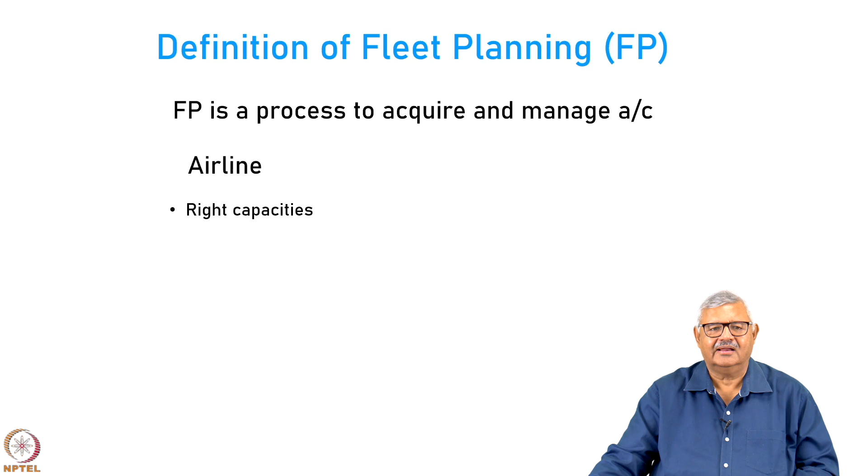Starting with the definition of fleet planning, it's a process to acquire and manage aircraft. Mark these words, all of these words are very important. Fleet planning is a process to acquire and manage aircraft, and for an airline, fleet planning ensures right capacities. For a leasing company, it represents the right portfolios.

These capacities of the airlines are required to serve the anticipated markets over many predefined time periods and to maximize the corporate wealth. That is fleet planning from the airline point of view, deploying the correct capacities on the anticipated markets over a period of time, the purpose being maximizing corporate wealth.

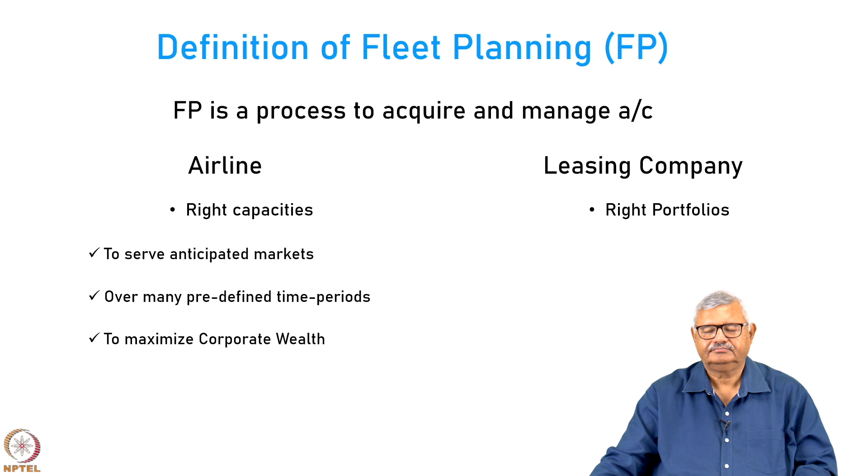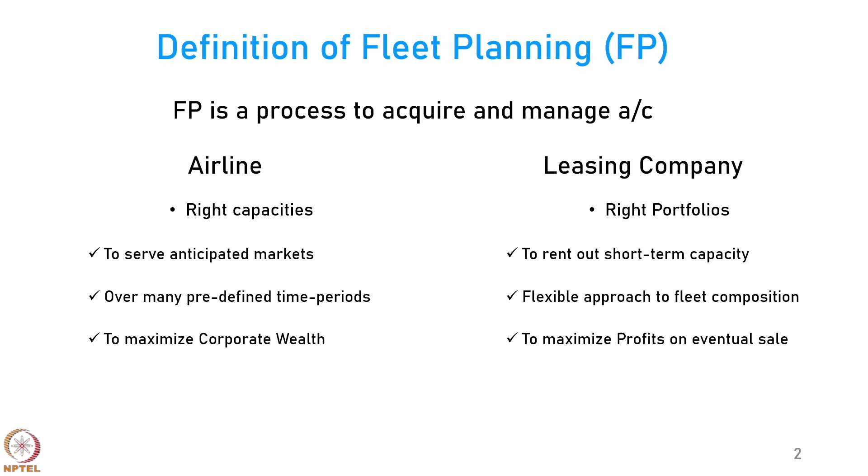For a leasing company, however, fleet planning has a slightly different connotation. Their aim is to rent out short-term capacity to various airlines who are unable to commit funds to buy large aircraft. It allows a flexible approach to fleet composition because an airline can lease and return the aircraft as and when its demand fluctuates. The aim of fleet planning from the point of view of a leasing company is to maximize their profits on the eventual sale of the aircraft.

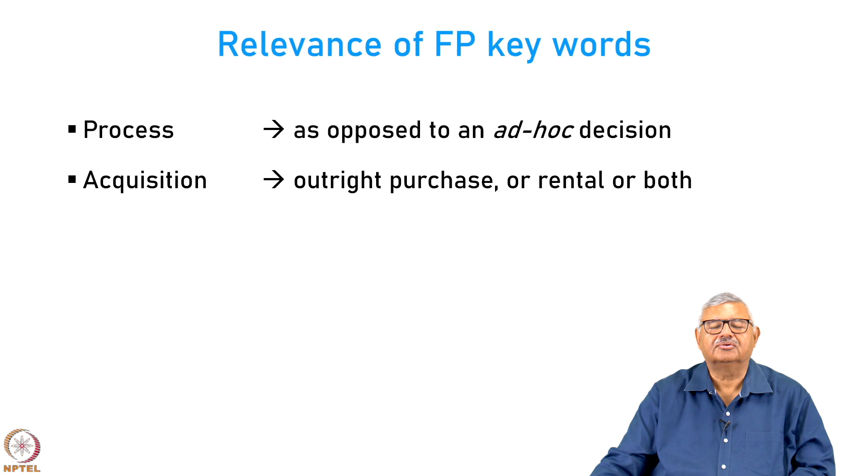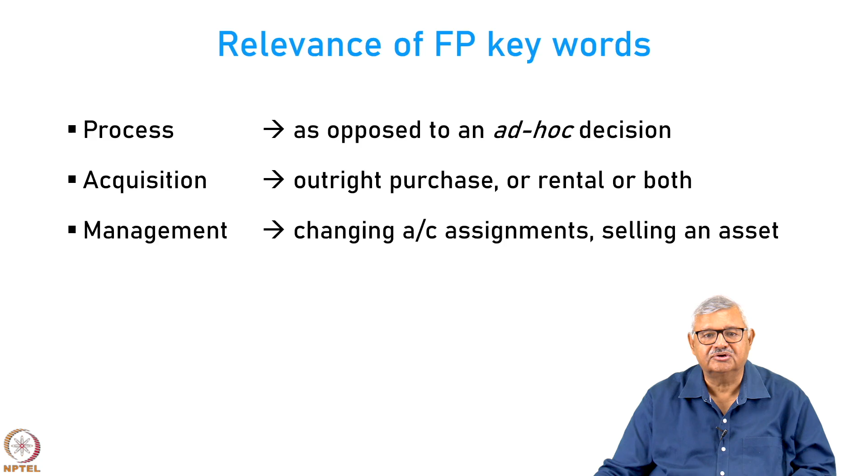There were many keywords in the previous statements which I made. Let us understand the relevance of each of these. Fleet planning is a process as against an ad hoc decision to simply buy a particular aircraft. When we say acquisition, it could mean purchase or rental from a lease agency or both. Then when we say management, what do you have to manage? You have to change the aircraft assignments, and you have to ensure that when the asset is being sold, it is done in a very consistent manner.

Capacity. Capacity stands for various things. It stands for number of seats. It stands for how much is the volume of the cargo you are carrying. Capacity also can stand for what frequency you are offering on a particular route.

Then remember, fleet planning is not done for today or tomorrow. It is done keeping in mind provision of services to the anticipated demand over short term, medium term and long term. You simply cannot buy and operate aircraft on a daily basis. You have to plan for it. It takes time. Airlines have a very long order book. You place the order today, you may get it after 5 years. Leasing companies can provide you the aircraft in a much shorter time, relatively, but only if it is available. So you have to look at not just today's requirement, but also the requirements of the forthcoming period.

The time periods could be keeping in mind the long-term view, keeping in mind that over a period of time a particular line becomes obsolescent, and also regulations might change. There could be tightening of noise regulations, emission regulations. So what you can use in the short term may not be usable after a particular period of time. So all this has to be kept in mind when we do the fleet planning.

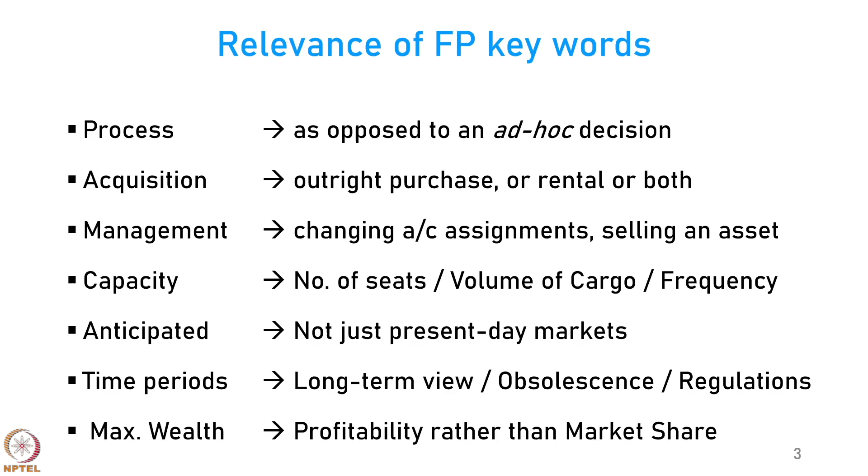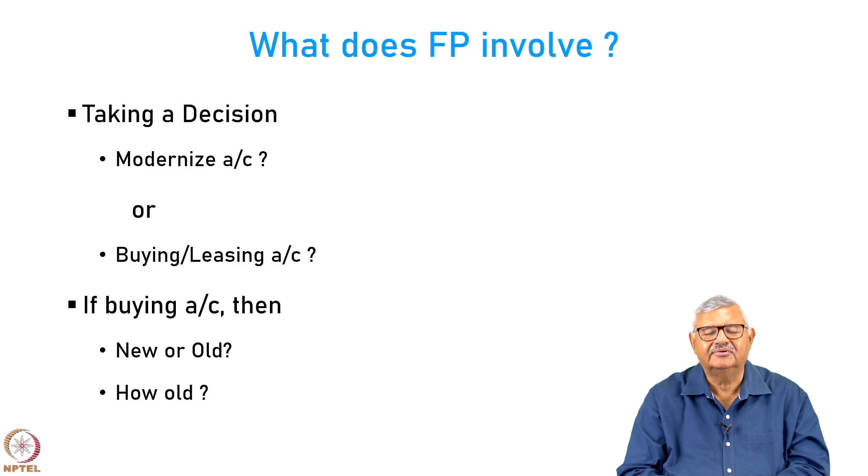What does fleet planning involve? There are some steps in it. Taking a decision. What decision? Should we modernize the aircraft, or should we buy or lease an aircraft? If we are buying the aircraft, then do we buy an old aircraft or a new aircraft? If it is an old aircraft because they come cheaper, how old? Because you have to keep in mind obsolescence, keep in mind that older aircraft will involve higher operating costs in terms of maintenance. They will also probably consume more fuel because they are old.

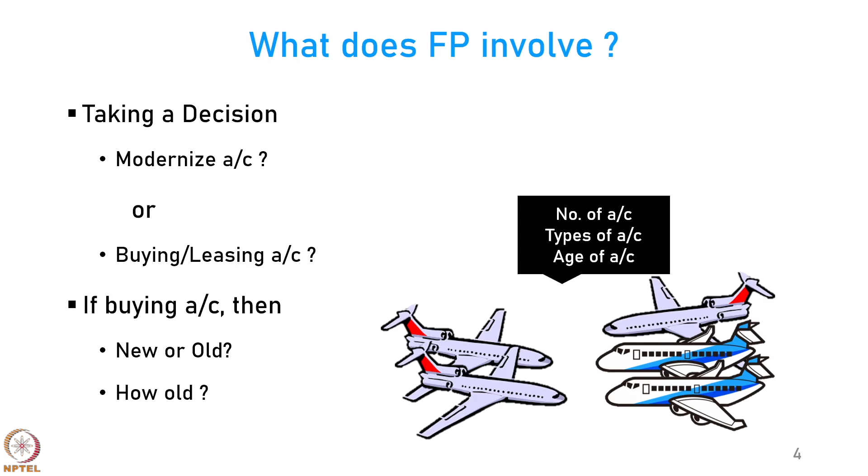So, number of aircraft, types of aircraft and age of the aircraft, all these factors have to be considered when we look at fleet planning. Now, there are many factors that affect the fleet planning decisions. Okay. Financial expediency,

investment in buying a new aircraft or even leasing a new aircraft is a large amount of money. It requires a huge amount of money. There is a risk and that risk has to be managed. Then it is a function of, are aircraft available? Okay. Are they available? Then sometimes the fleet planning is a decision based on national pride, that if you are

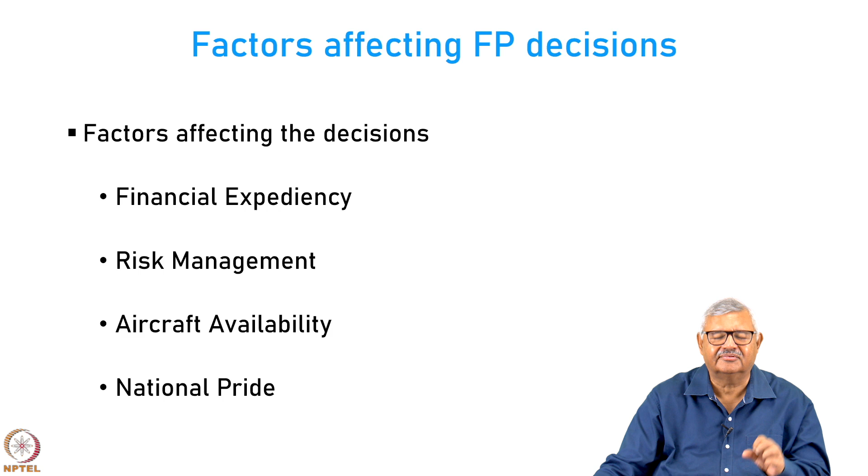running a national airline, you need to have in your kitty a certain amount of aircraft that can ensure that you are not at the ransom of some agencies or leasing companies. You are not dependent on them to meet your basic requirements. So, a certain amount of aircraft, because of national pride, may be required to be in your kitty. Fleet planning is not a short term issue, it is a long term issue.

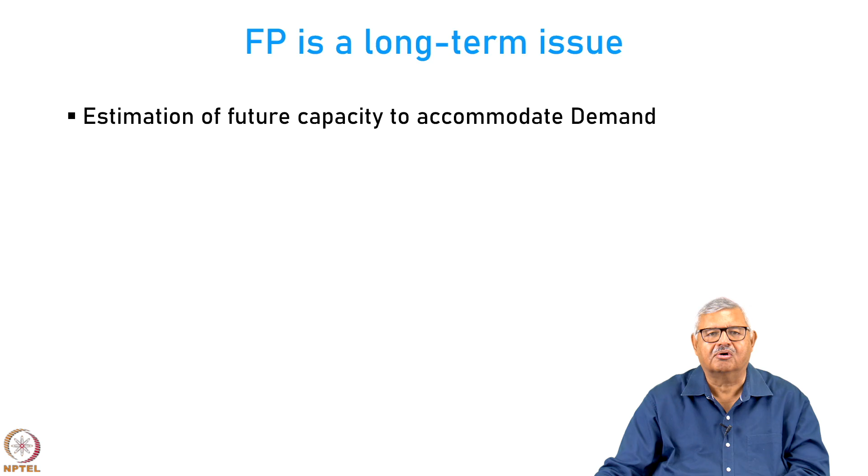Of course, there are some short term decisions to be made also, but the primary aim of fleet planning is to estimate the future capacity to accommodate the demand on both the new routes that you are planning to operate and also on the existing routes. We have to look at the changes in the market share and the infrastructure, which also affects the fleet planning

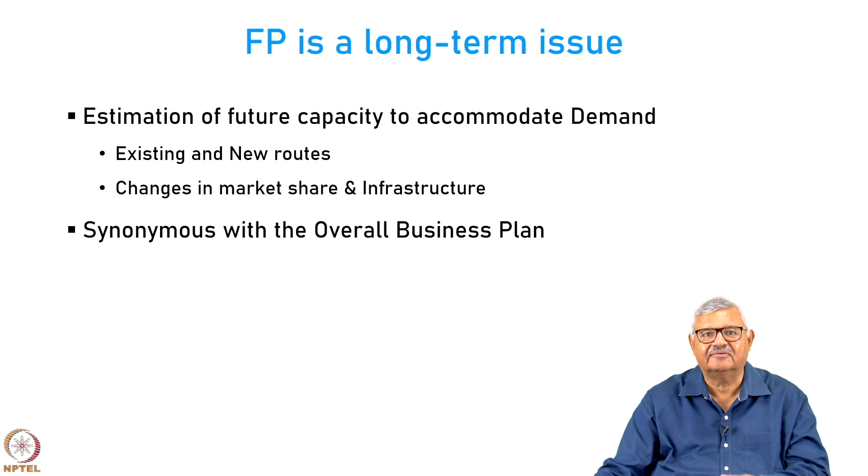decision. So, fleet planning is synonymous with the overall business plan in many cases, because the aircraft configuration that you operate directly affects the brand and that brand can influence the market behavior, right. So, there is a requirement to constantly adjust capacity and frequency, otherwise you might be operating inefficiently.

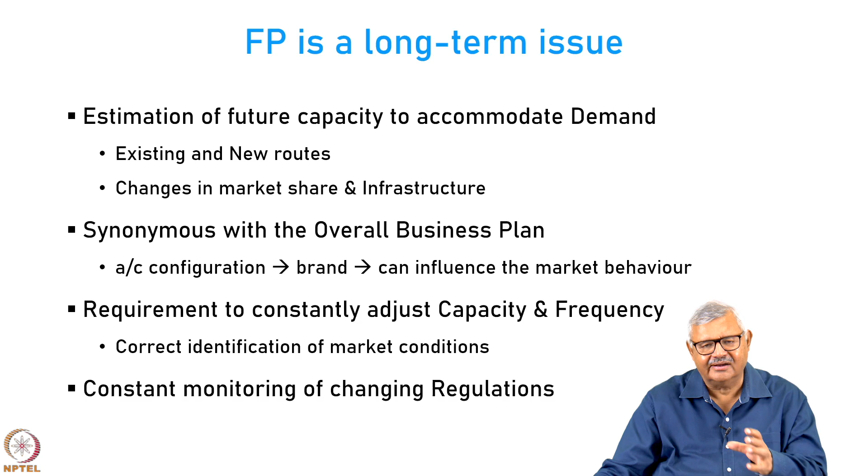So, to correctly identify the market conditions and then, with respect to that assessment, adjusting capacity and frequency is a very important requirement, and there is also a need to constantly monitor the changing regulations. Regulations are becoming tighter and tighter, emission regulations, noise regulations. Okay. So, technical as well as economic, both regulations have to be considered while planning the fleet.

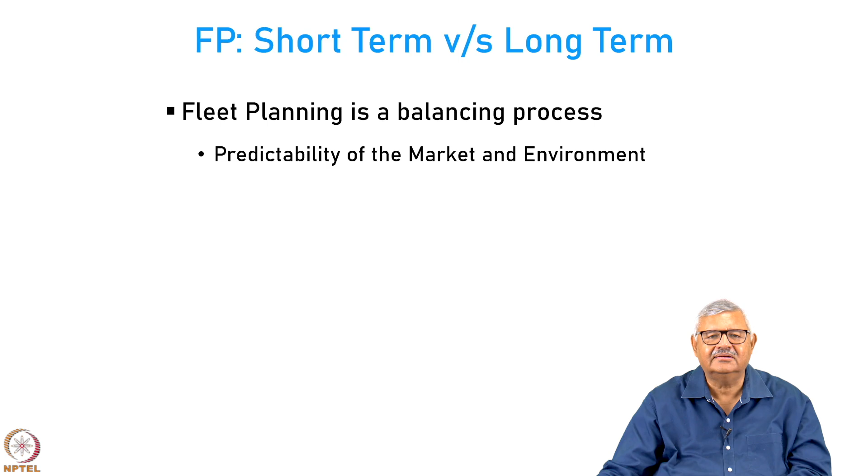As I mentioned, there are some short term activities in fleet planning, but it is primarily in the long term. So, it is a balancing process. Okay. You have to look at the predictability of the market and the environment, and you have to balance the adaptability of resources, because you have limited resources, they have to be adapted.

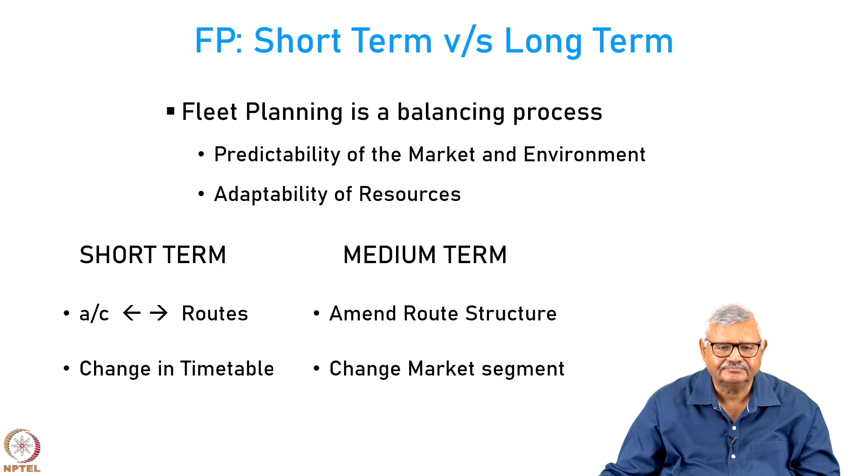So, short term aspects of fleet planning involve deciding the aircraft to deploy on specific routes and changes in the timetable. So, this will come broadly under scheduling. Medium term is when you amend your route structure and you change the market segment as you slowly evolve in the business, and long term is fleet rollover and changing the business model that you might like to operate.

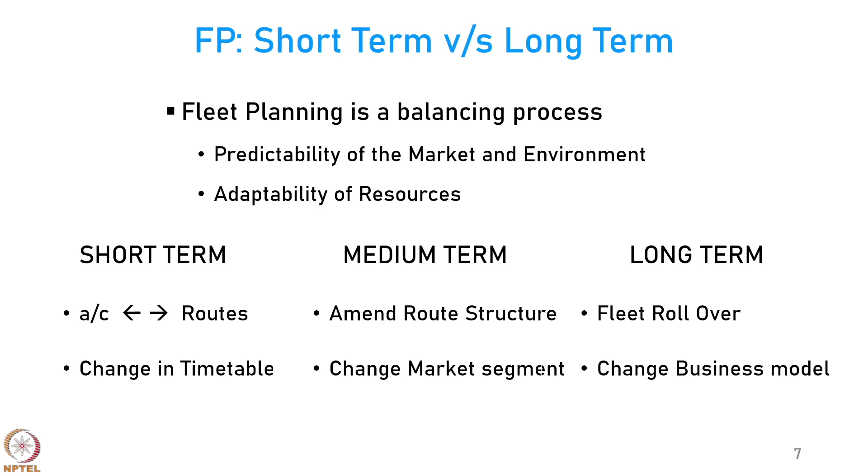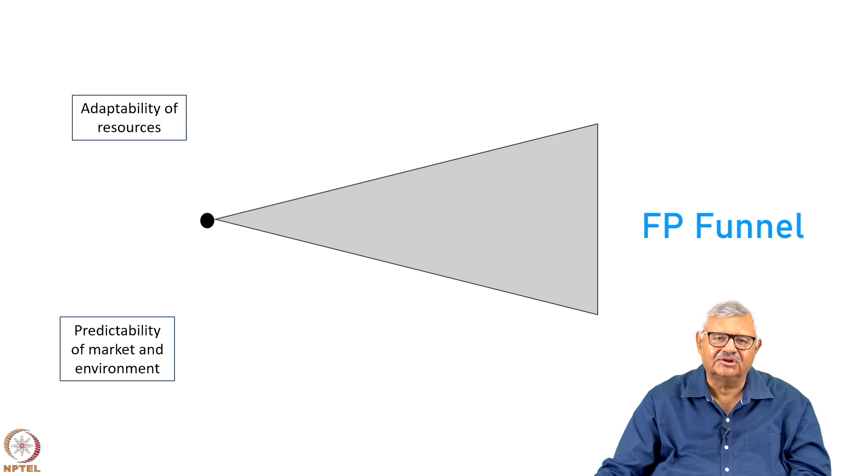So, there are three terms in which we do fleet planning, and each of them is important and each of them decides the company's bottom line. Let us look at the fleet planning funnel, which slowly increases with time in its dimension. So, here there is a balancing of two items, adaptability of resources and predictability of market and environment.

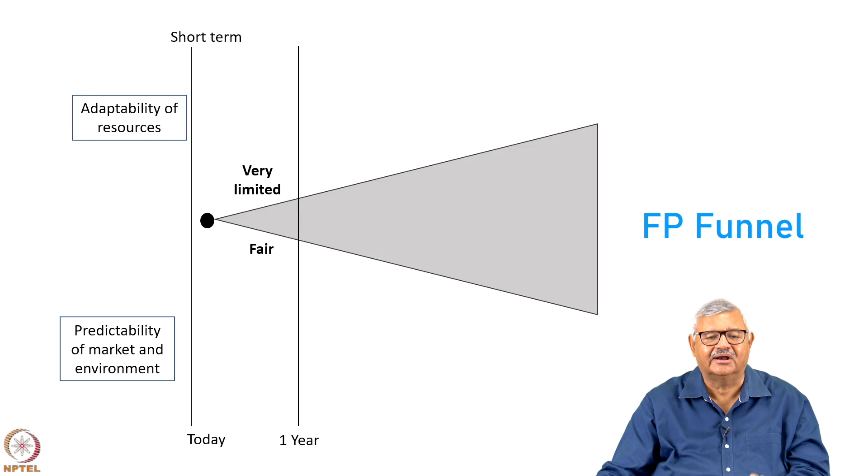So, we will notice that as we go from today to 1 year, that is called short term fleet planning. Here the adaptability of resources is very limited, because resources cannot be quickly changed. Okay. But you already have a very good idea about the market environment and you can predict fairly accurately what you will require in the next 1 year. So, in the short term you have good predictability of market environment, but very poor adaptability of the resources.

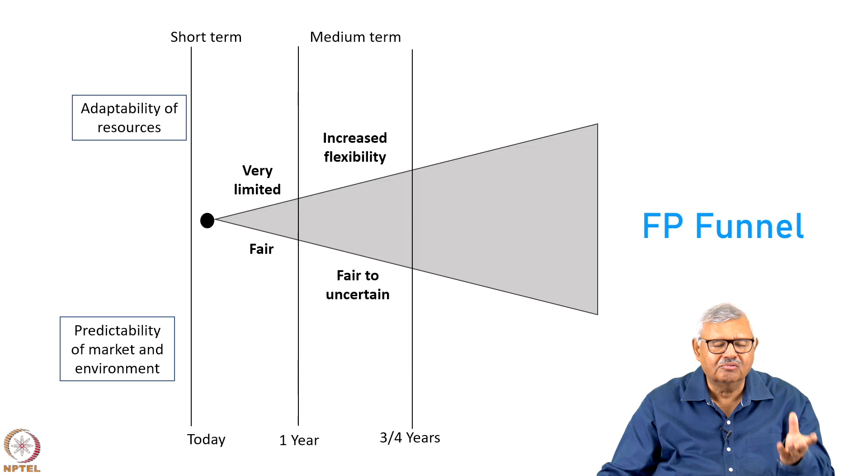As you move ahead to medium term, your predictability of market becomes fair to uncertain, but your flexibility increases. That is the width of this funnel, it increases. And finally, when you go to the long term, you enter the regime of strategic planning. Here you have much larger flexibility, but it is also highly uncertain. That happens over the next 10 to 15 years.

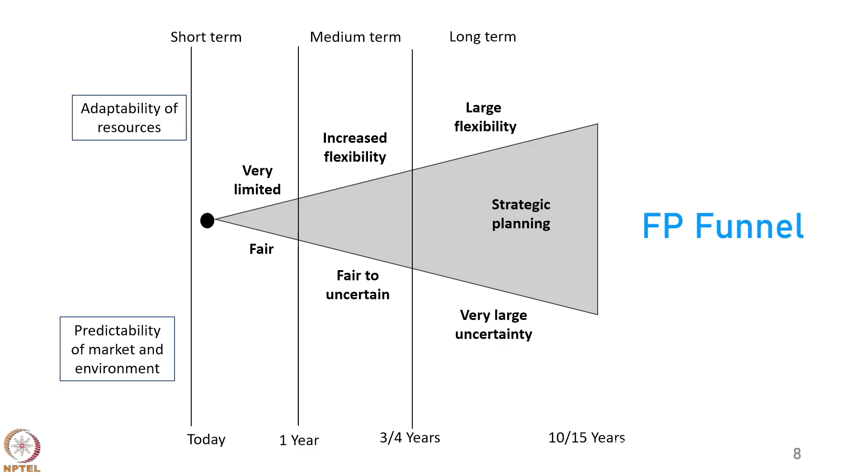But unfortunately, we have to plan for all these three: short term, medium term, long term when we do fleet planning. Let us see how we handle timing conflicts in fleet planning. We have to increase the response to match the resources, because those resources are going to be affected by market changes, and the market changes will also affect our response to the resources.

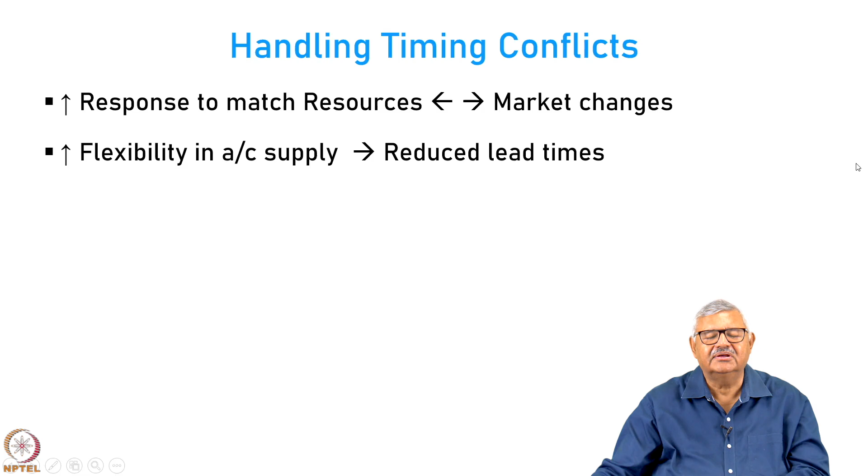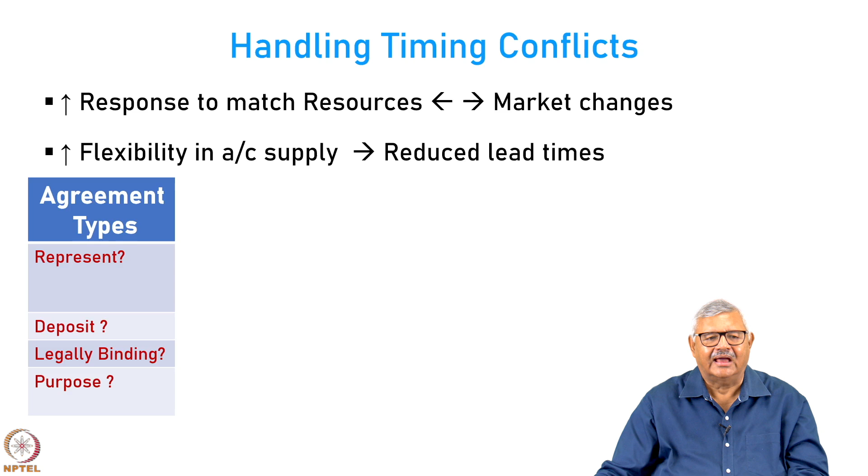We have to go for higher flexibility in aircraft supply, because there is going to be a reduction in the lead times as a consequence of that. So, there are many agreement types which are signed by the airline with the leasing companies or with the aircraft manufacturers. There are 4 aspects in which we will compare these agreement types: what they represent, what kind of deposit is to be paid, are they legally binding, and what is the purpose.

So, the first one is letter of intent. A letter of intent is simply a desire to do business together. You have a product or a facility that we are interested in, but we are not depositing anything. There is no legal binding, and the purpose of this is to manage your risk. So, you have to be in touch with what is coming in the future. For example, today there are newer types of aircraft planned on the horizon, such as electrical aircraft, or aircraft that are using hydrogen fuel for their propulsive devices.

Now, many airlines are having LOIs with these companies to tell them that, look, in principle we are ready to do business with you, but we are not sure right now, we are not committing. So, therefore, we do not want to have any legally binding contract or give you any deposit, and all we want to do is understand how the market is evolving so that we can manage our risk in the long term. We do not want to be left out.

When you have an MOU with an agency, then you sit down and discuss the terms and conditions of doing business. Maybe there is a small deposit. MOUs are legally binding, because in an MOU you write down how you will be doing the business, and if somebody breaks those conditions, one can take them to court. The purpose of an MOU is to have a much larger commitment to a particular product or service which is likely to be available in the near future. So, it is a little bit more serious.

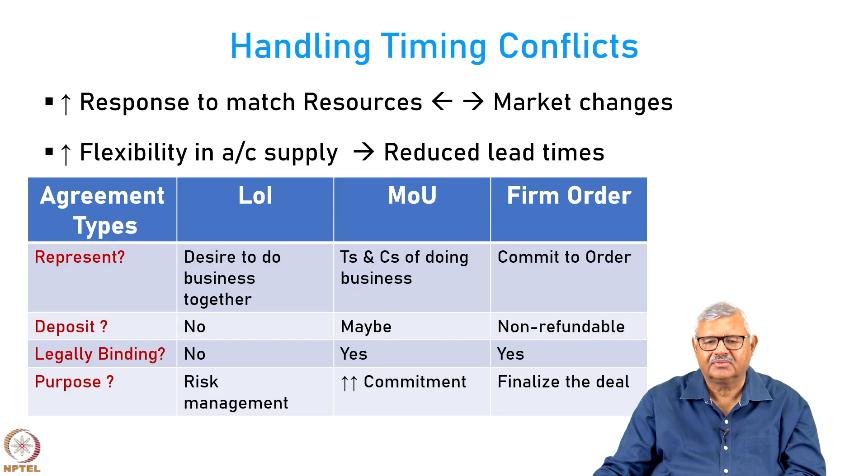Then we have a firm order. Firm order means, I commit that I am going to order this product from you. There is a deposit necessary, and the deposit could be non-refundable. In some cases, there are airlines who have what is called options. In options, you do have a deposit, but you have the option not to execute the order later, or you can transfer that order to some other agency or airline who might be requiring that particular product at that point of time. A firm order is legally binding, and the purpose of a firm order is to finalize the deal.

As I said, options are to hedge the risk. Deposit is there, but it is refundable. It is legally binding. But the purpose of an option is that I do not want to commit right now, I do not want to pay upfront a large amount of money and block. I want to delay my procurement. If my conditions improve, and my requirements turn out the way I predicted, then I can procure at that particular time. At that time, I do not want to go to the market and look for options, because it will be too late. So, that is the meaning of options.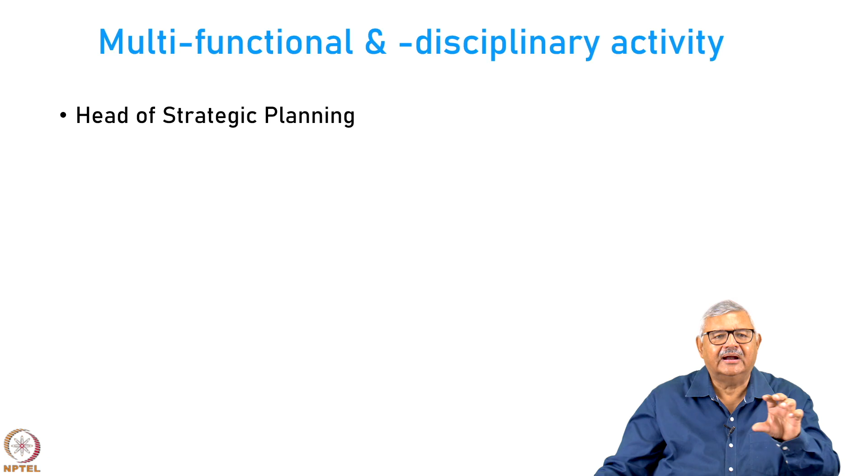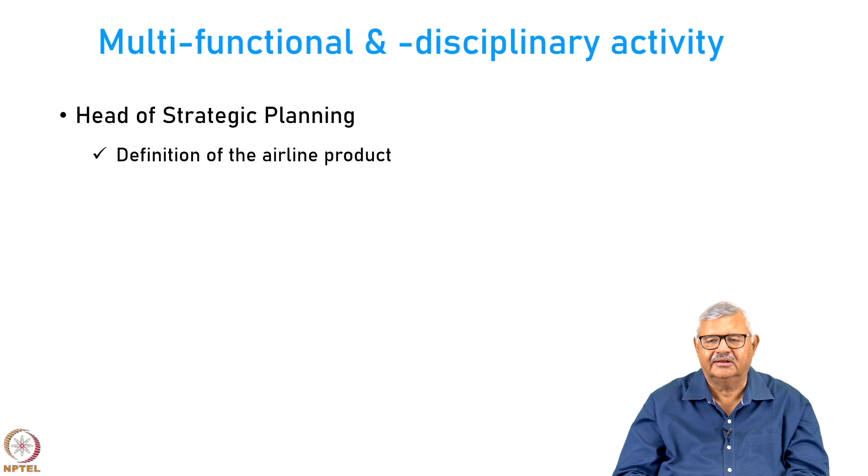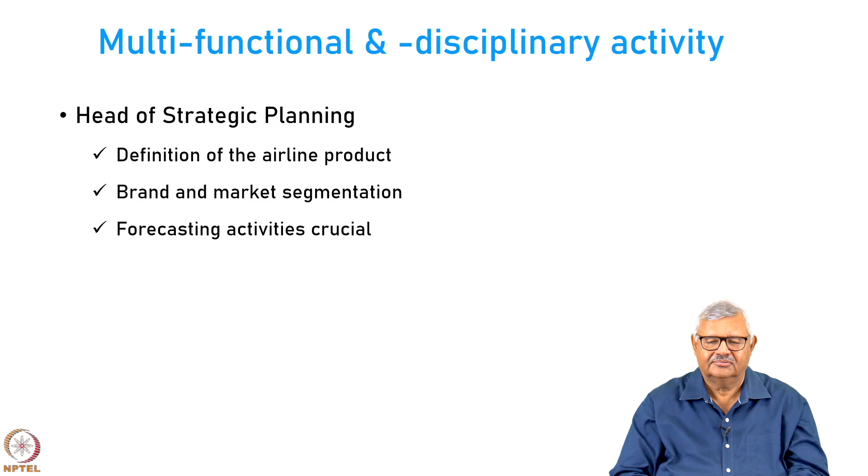Let us look at the nature of fleet planning as a multifunctional and multidisciplinary activity. There are 3 or 4 departments here. One department is strategic planning. The head of strategic planning is concerned with the definition of the airline product. What are we offering? Are we a low cost airline, an ultra low cost airline, or a full service airline? They are worried about the brand and the market segmentation of their airline. They are concerned about forecasting. Their crucial and most important activity is forecasting. What will happen in the future?

Then you have another group of people headed by the head of flight operations. Flight operations is interested in the schedule. For them, schedule is paramount.

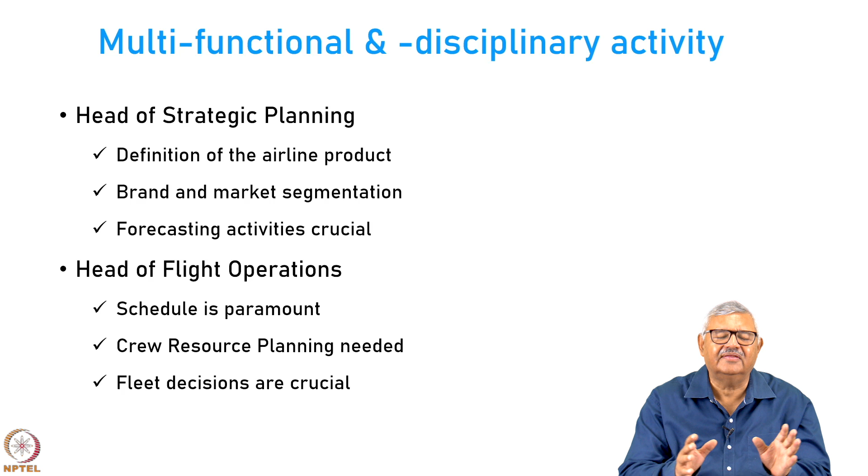Okay. Forecasting is not important for them. For them it is important to plan a schedule based on the forecast given by the strategic planning department. There they are interested in crew resource planning: how do I couple my crew members and my resources together to ensure that I have a scheme by which I can meet the requirements. And here the decisions are regarding the fleet. So you can say that the scheduling activity comes primarily under flight operations.

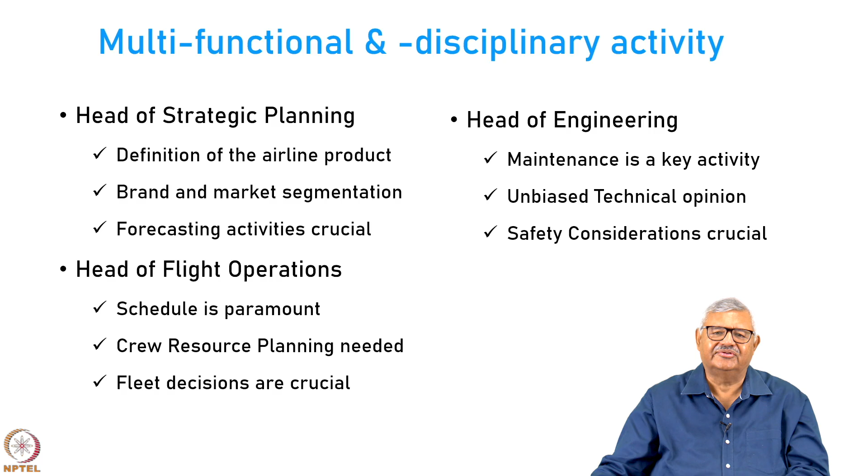Then we have engineering. Engineering is only interested in providing the requisite support to the fleet operations. Their job is that when you fly an aircraft or operate a particular fleet, you require regular maintenance of the airframe, of the power plant, of the avionics systems. So they will give unbiased technical opinion on what is needed to provide service. They are concerned about safety. They are primarily interested to ensure that the aircraft operates safely.

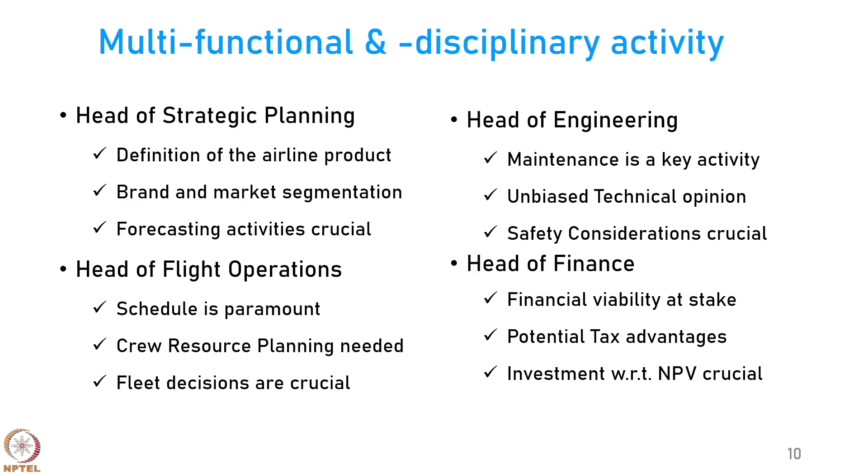And then we have a finance department. Finance department is concerned only about financial viability of the whole business. If the financial viability is not established, then the whole airline has to stop operating. They look at potential tax advantages, schemes, they look at investment versus the net present value. And therefore all these four departments work together in a successful airline. So that is why fleet planning is useful for all of them in some ways.

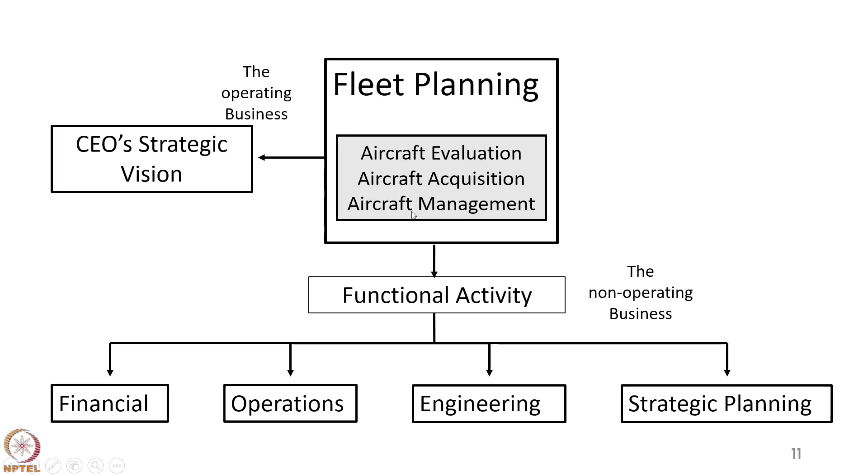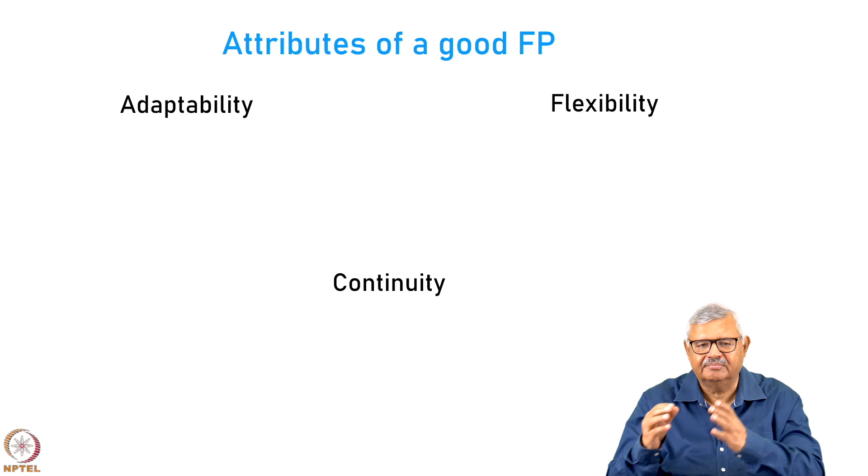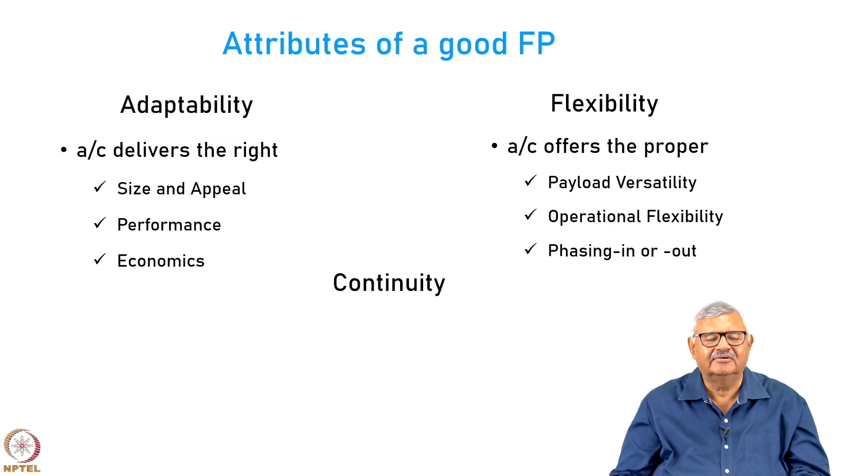Now, what are the attributes of a good fleet planning? Three main attributes. A good fleet planning activity is adaptable, flexible and it ensures continuity. Under adaptability, a good fleet plan will assure that the aircraft delivers the right size and appeal, the right performance and the right economics. Under flexibility, we ensure that the aircraft offers versatility of payload, operational flexibility, and we can easily phase in or phase out the aircraft.

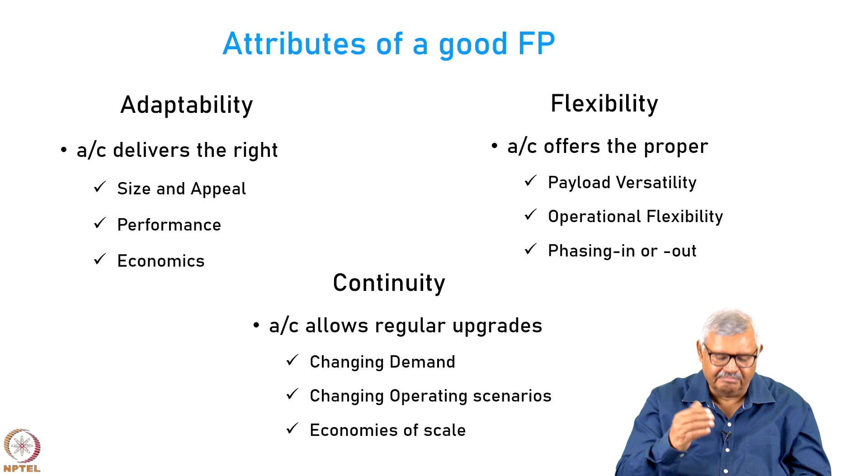In continuity, we ensure that we allow the aircraft to be regularly upgraded, so that we can adjust to changing demands, change the operating scenarios, adjust the number of seats, adjust the mix between cargo and payload, and we ensure the economy of scales. So a good fleet plan will look at all these three aspects together.

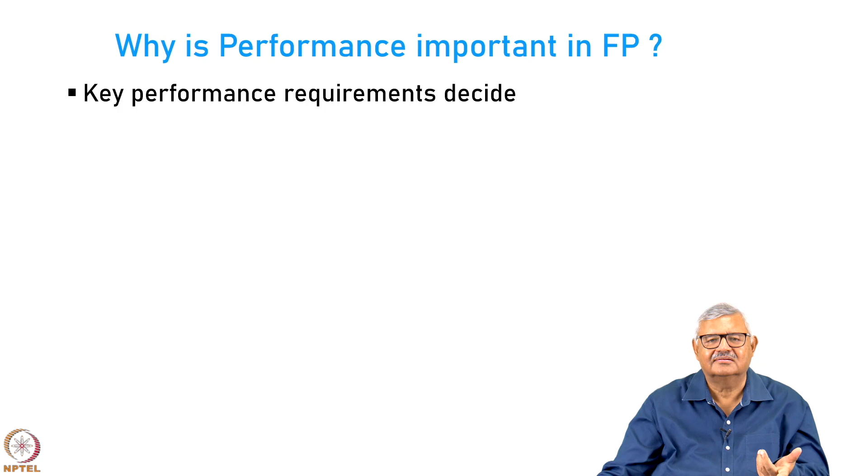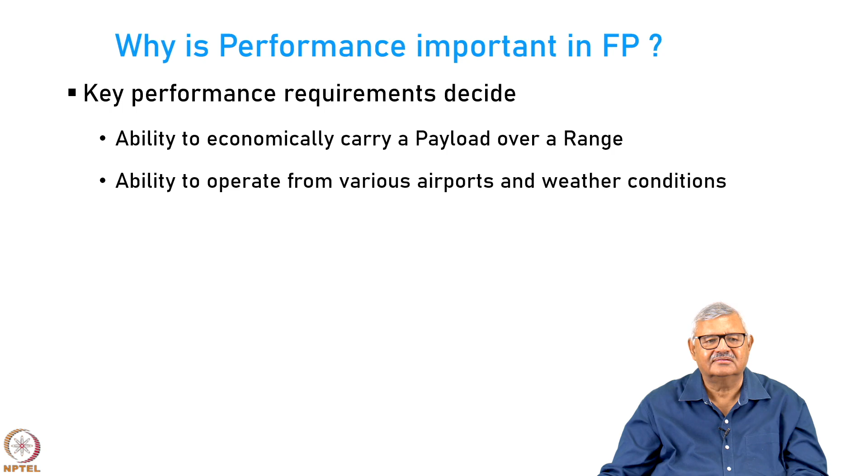Now, why is performance important in fleet planning? Because performance decides whether aircraft can do something or not. Can it carry a payload over a range economically? Can it operate from a particular airport and under particular weather conditions? Performance is the cornerstone of aircraft evaluation, because when you evaluate the aircraft, you want to check whether it is able to operate from the routes where you want to operate as per the strategic plan of the airline, because that is what gives you access to the markets.

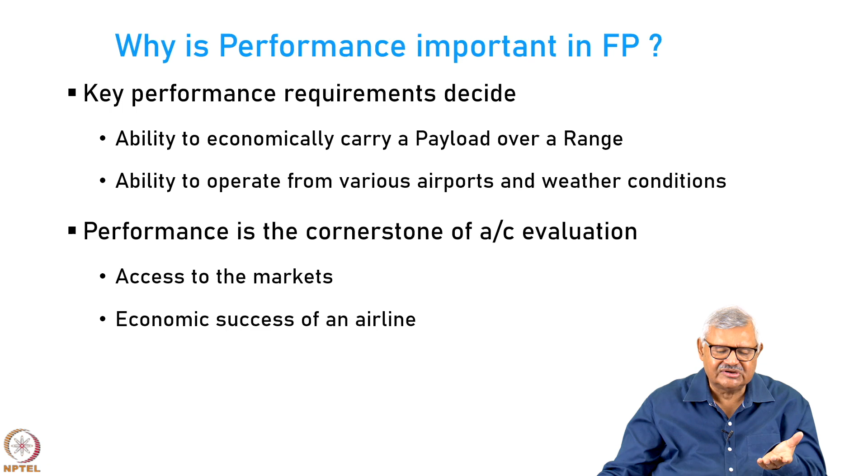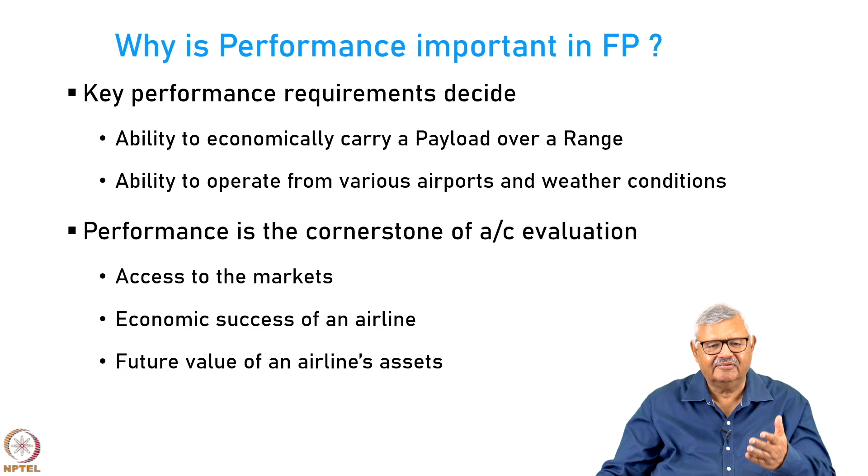There may be a market at some place, but if your aircraft cannot go there because of fuel limitations, or if the takeoff and landing distance required is far more than what is available, you can't access that market. Performance hits the economic success of the airline, because if you do not fly efficiently, consume less fuel, require less maintenance, you will become an economic nightmare for the airline. Performance also matters because the future value of the airline assets depends on it. This is the key differentiator between competing aircraft.

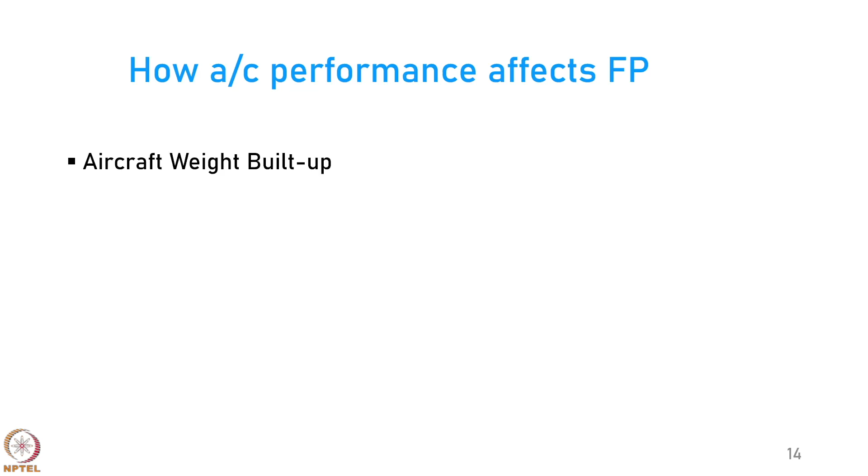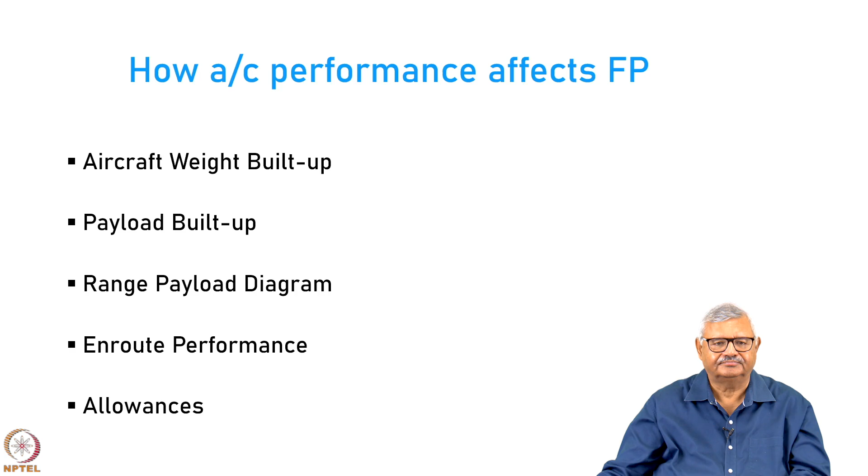So how does the aircraft performance affect the fleet planning? Let us look at it a little bit deeper. The important thing is the aircraft weight build up, how the aircraft weight slowly builds up. Then we look at the payload build up, the range payload diagram, the en route performance, and we will look at allowances. So let us see one by one. First, we look at the aircraft weight build up.

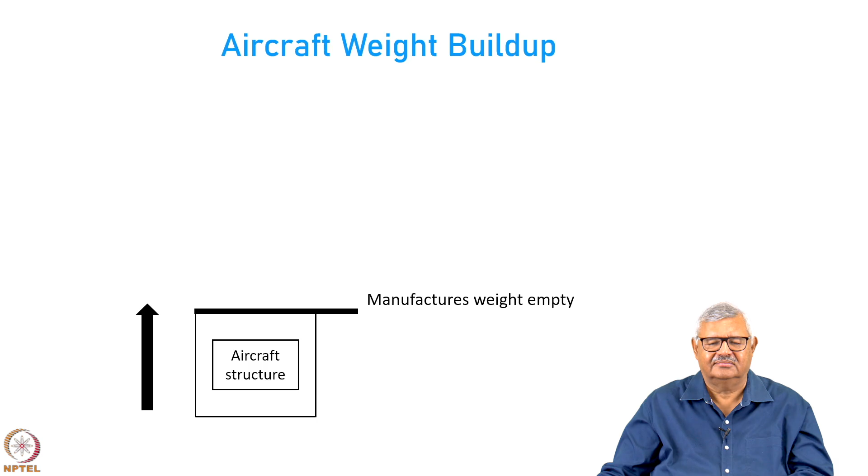Now, the minimum weight of the aircraft that comes to us from the manufacturer is called the manufacturer's empty weight, MEW. This has been supplied by the manufacturer or the leasing agency. Now, on that we have to add certain items which are called the operating items. These items vary with the airline requirements. For example, low cost carriers do not bother to carry a lot of operating items like food, beverages. They may carry food, but because it is chargeable, they have to ensure that they carry only that amount of food which is sold or consumed during the operations.

Similarly, the amount of facilities like water bottles, newspapers, magazines, or the earphones which are provided by the airline depend on its operating scenario and its type. So, the operating empty weight varies from airline to airline, but it is required to operate the aircraft. So, without the operating items you can't fly the aircraft. So, therefore, operating empty weight or OEW is the minimum weight of the aircraft for operation.

Now, above this what do you do? You only add payload and you add fuel, that is all. So, when you add the maximum possible payload that the airline can carry, you get what is called zero fuel weight, which is the operating empty weight plus the maximum payload. Now, on zero fuel weight you are going to add the fuel till you reach the limit of takeoff. Now, there is a number corresponding to the total fuel plus payload which the aircraft can carry. So, you can't exceed that number.

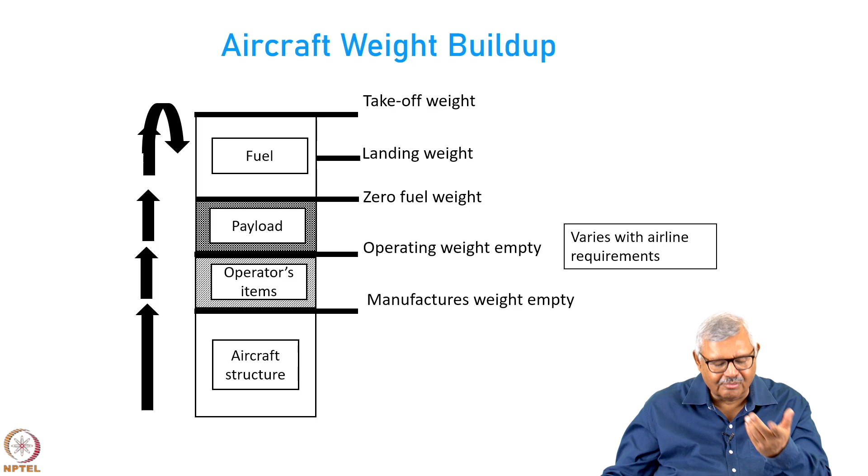And here one more thing is to be kept in mind, that takeoff weight of course is the maximum weight that the aircraft can be allowed to carry, but when it comes in to land, there is also a limit on the maximum landing weight. So, therefore, you have to ensure that when you plan the profile of the aircraft, you do not encounter a situation where the aircraft weight at landing is more than the maximum landing weight, because that will lead to a problem with the maintenance. Okay. Now, these things, takeoff weight, landing weight and zero fuel weight, vary with each route and they are subject to some maximum structural limits.

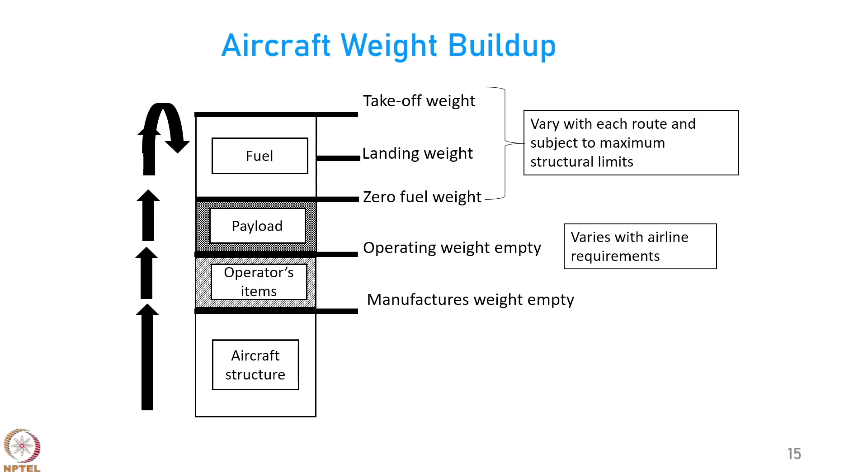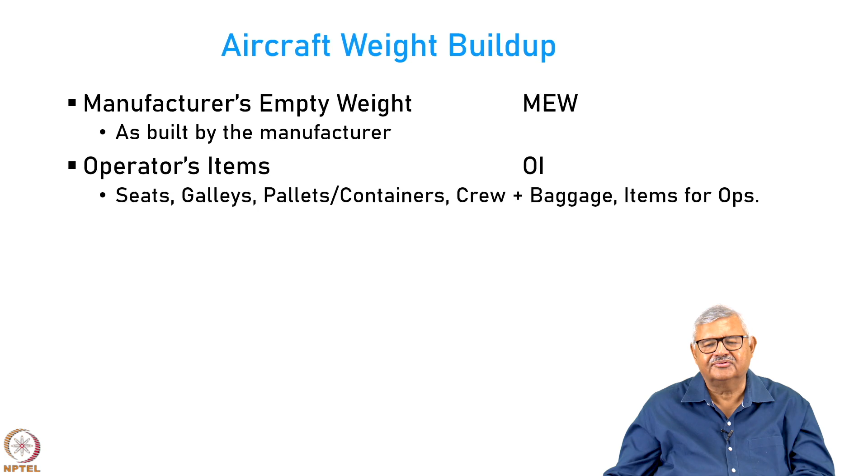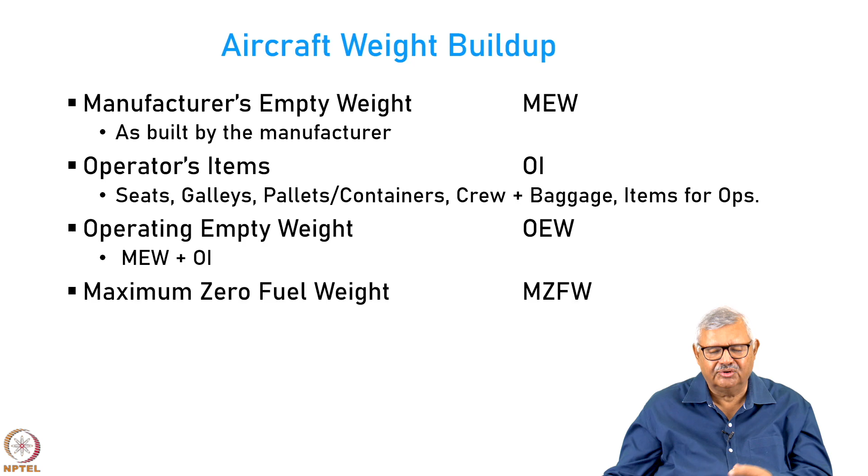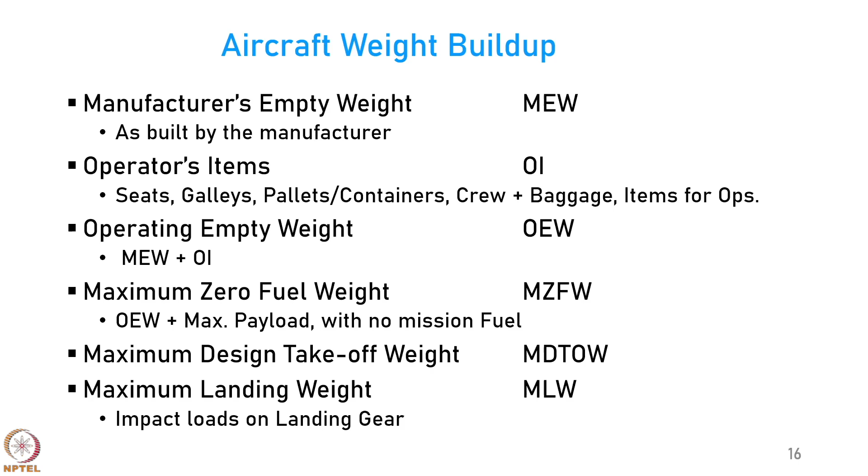So, as I mentioned, the least item is the manufacturer's empty weight, MEW. This is what is given by the manufacturer. On top of that, we have operating items which are seats, galleys, pallets, containers. Crew and baggage also come, and items for operation come there. With this you have the operating empty weight, which is basically the manufacturer's empty weight plus the operating equipment. Then you have maximum zero fuel weight: you add the maximum payload to the OEW and you get maximum zero fuel weight, and here there is no mission fuel. Then you have maximum design takeoff weight and maximum landing weight, depending on the loads which come on the landing gear.

Right. Now, there are two payload decks in a typical aircraft. There is the upper deck and the lower deck. Now, I am not talking about an aircraft like the Airbus A380, which will have three decks actually. There will be an upper passenger deck, a middle passenger deck and a lower deck for payload. In a typical aircraft, you have a passenger deck and a cargo deck. So, upper deck and lower deck.

In the upper deck, you carry passengers, and generally in airline service there is a norm that each passenger is 84 kg, each child is 35 kg, and the charter airlines offer a lesser option. Okay. Then you have cabin baggage. Again, it depends. If you are a full service airline, you will allow 15 kg baggage, maybe one bag per person. In some cases more than one bag, it could be chargeable or not chargeable depending on the service that the airline offers to you.

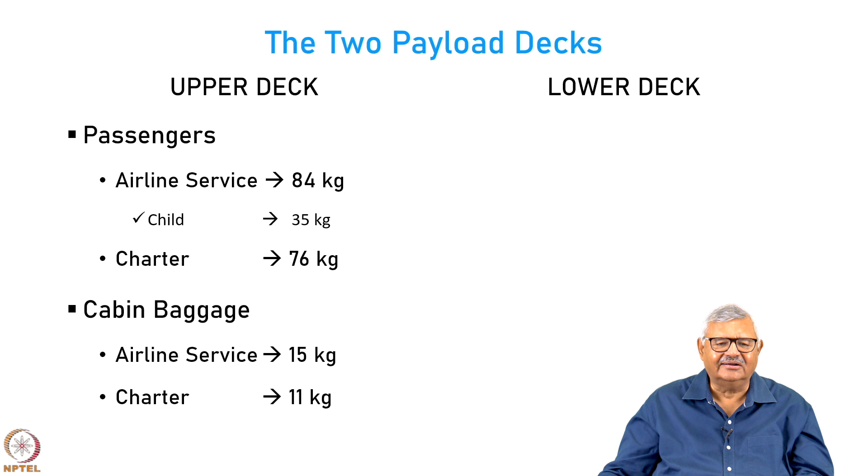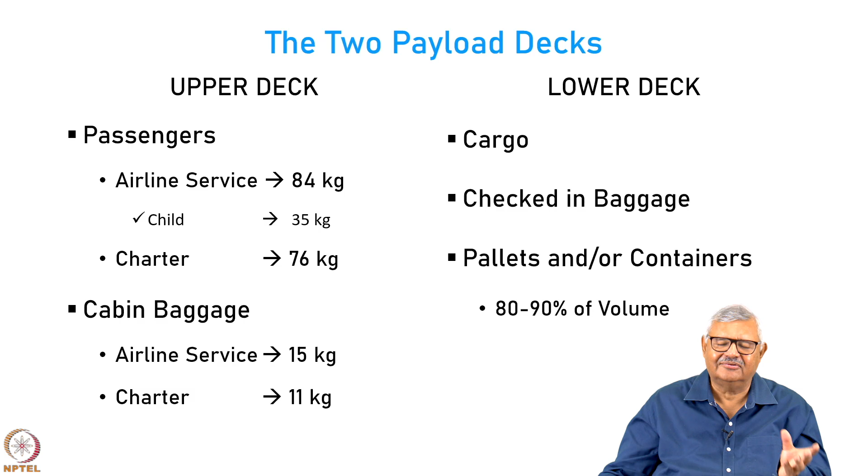In charter airlines, you generally allow a lesser amount of cabin baggage. In the lower deck you have cargo and also the checked-in baggage which the passengers have brought. Plus it will contain pallets or containers depending on whether you have a palletized cargo service or a container cargo service. It will occupy around 90% of the volume.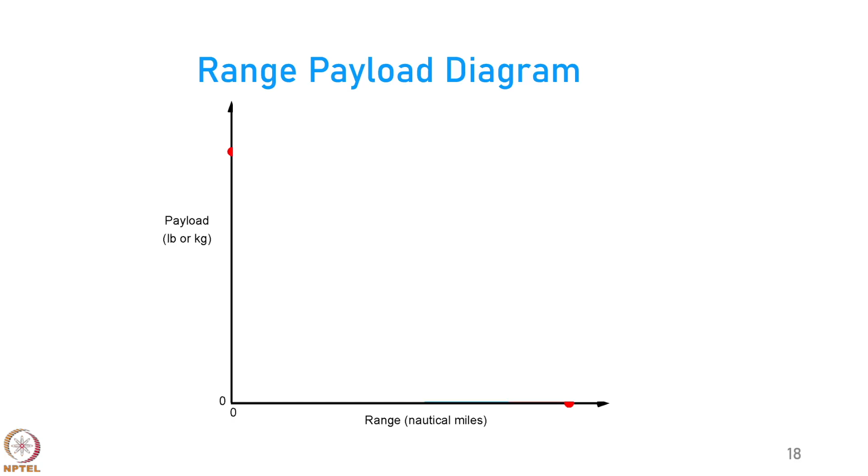Now, with the trade-off between range and payload, as I mentioned, we need to understand the range payload diagram, or RPD. Most airlines would like to travel with maximum payload, but they can only go to some particular distance, because after that they will hit the maximum takeoff weight limit. So this particular range, corresponding to this point with maximum payload, is called the harmonic range.

After this, if you want to travel further, you need to have some trade-off between fuel and payload. So you reduce the payload and increase the fuel. That allows you to go to a longer distance. But you keep on doing it till you hit the maximum fuel tank limit. So all points along this line correspond to the maximum takeoff weight line, where there is a trade-off between payload and fuel.

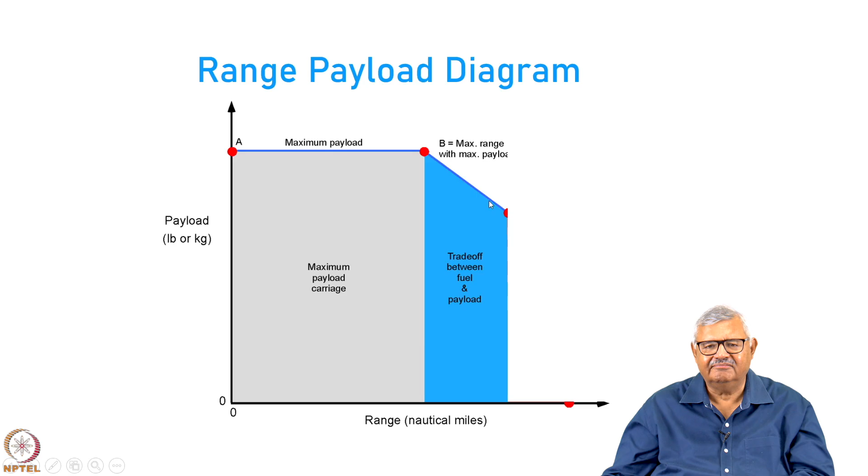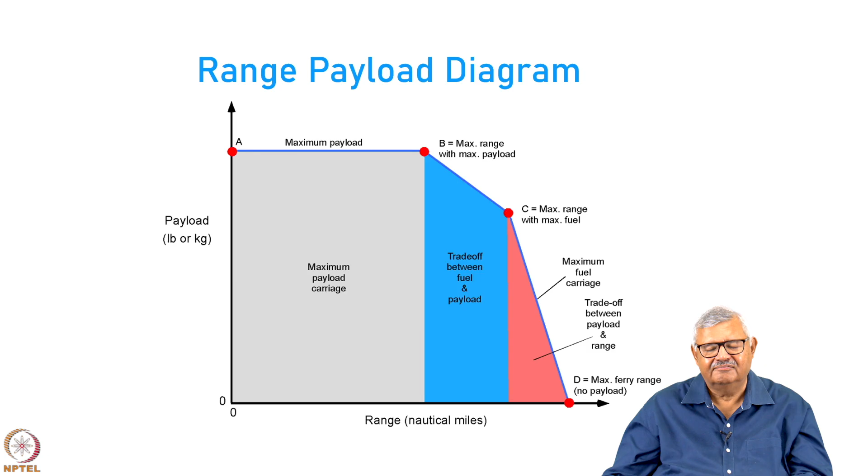But when you come to this point C, you have now hit the maximum fuel tank limit. After this you cannot add any more fuel because your fuel tank is full. If you still want to travel further, you have to reduce the payload, then you can travel a little bit more distance, and ultimately you come to the maximum distance you can travel with zero payload and maximum fuel. So, this is the range payload diagram.

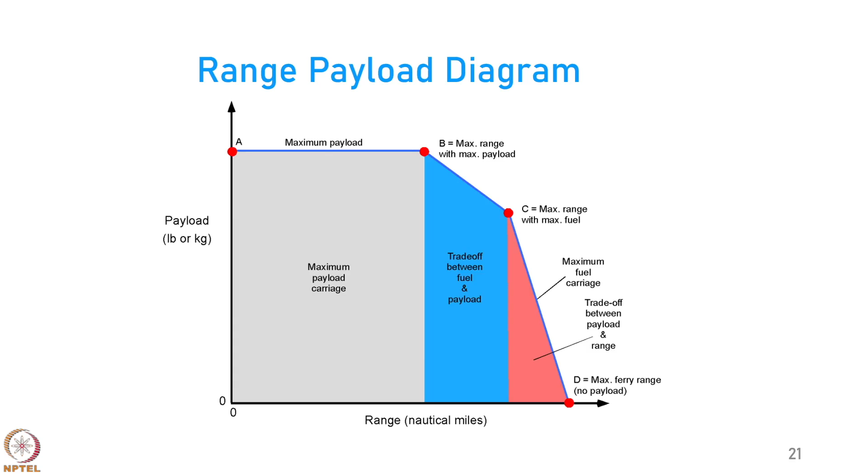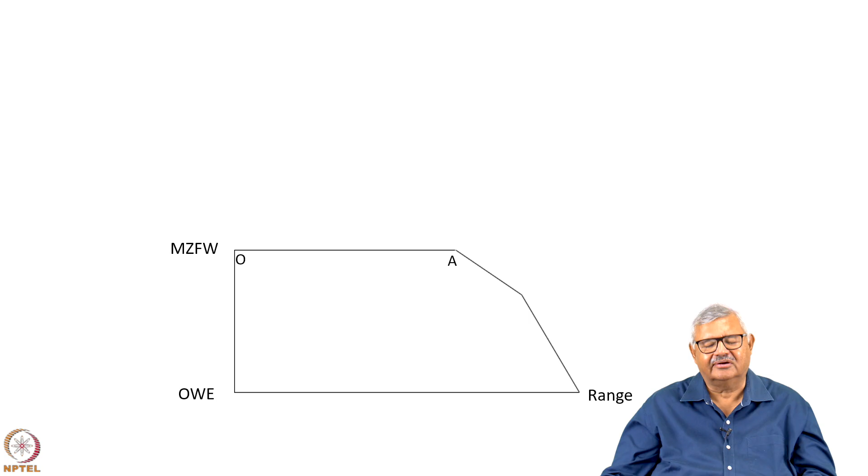So this is the basic diagram, where point O corresponds to zero range, just an aircraft with operating empty weight and the maximum payload. So it is the maximum zero fuel weight. Now, when you add fuel, you get range; you keep adding more fuel till you reach point A, where you hit the maximum takeoff weight limit. Now you cannot travel any further with full payload. So you have to start the trade-off till you reach point B, where you hit the limit of maximum fuel tank.

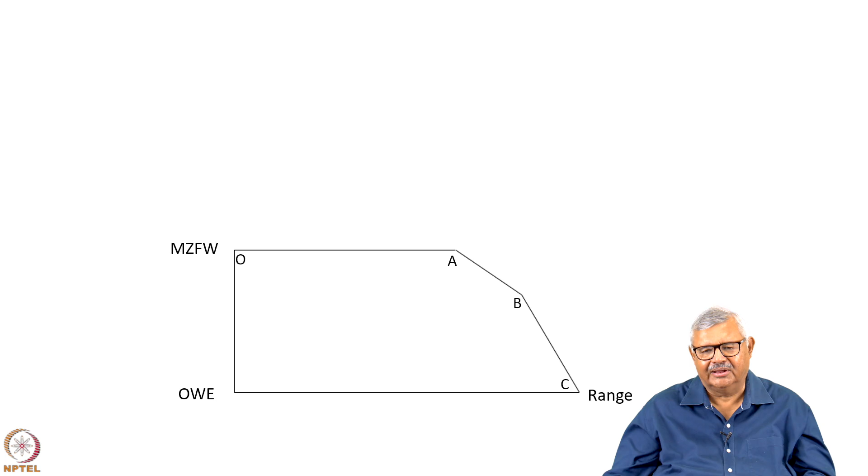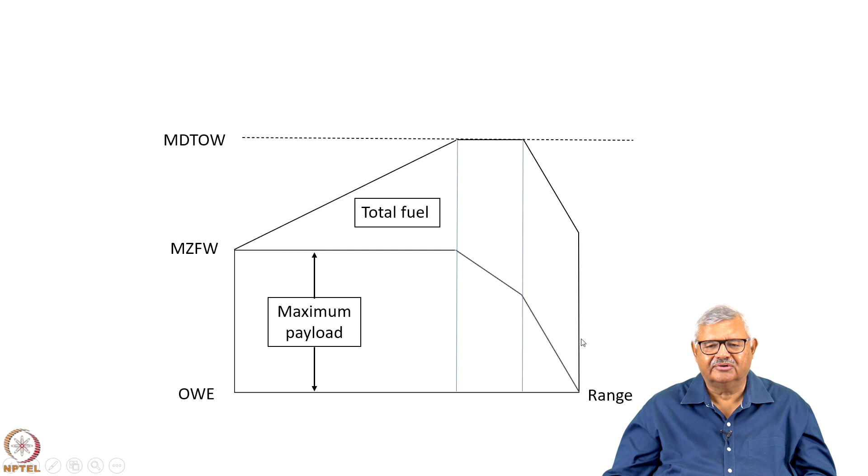After that you can only travel further by reducing the payload till you hit the ferry range point, where there is zero payload, full fuel, and maximum distance travelled. So this is the maximum payload and this is the total fuel line. As you can see, from this point to this point you keep adding more fuel till you hit the maximum design takeoff weight line. After this you cannot add more, and beyond this point, to travel more distance, you need to reduce the takeoff weight by reducing the payload further.

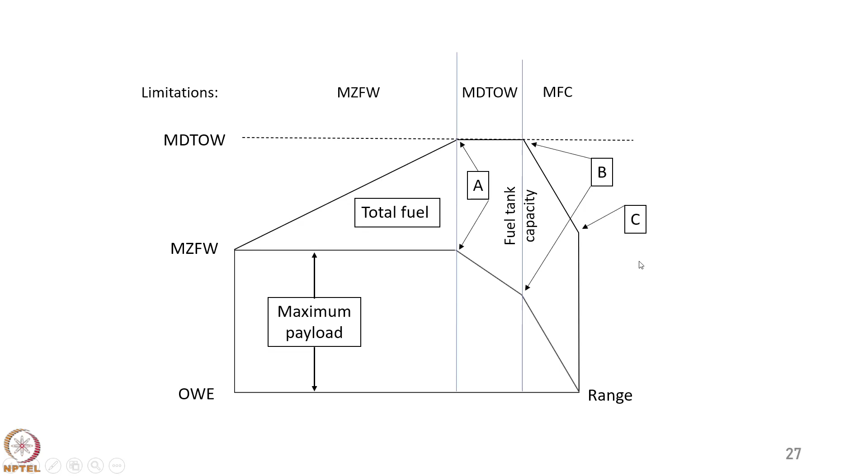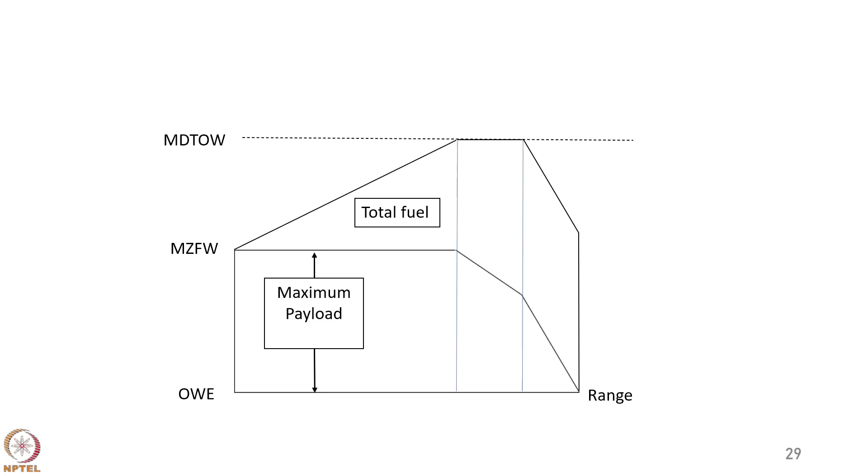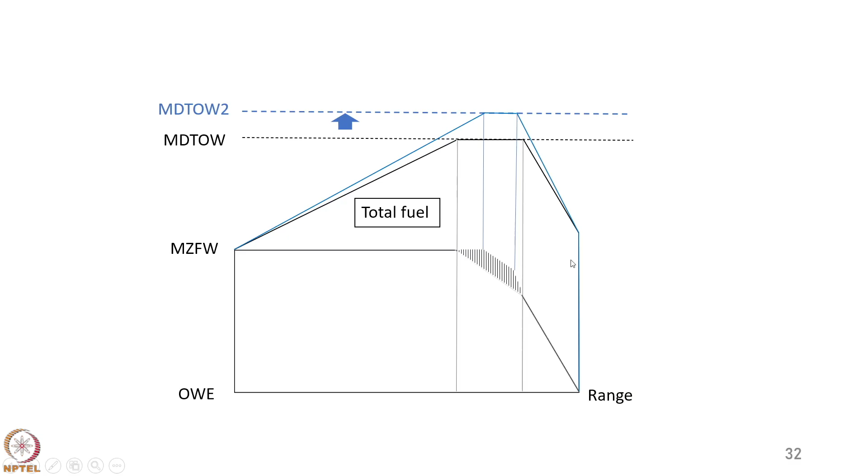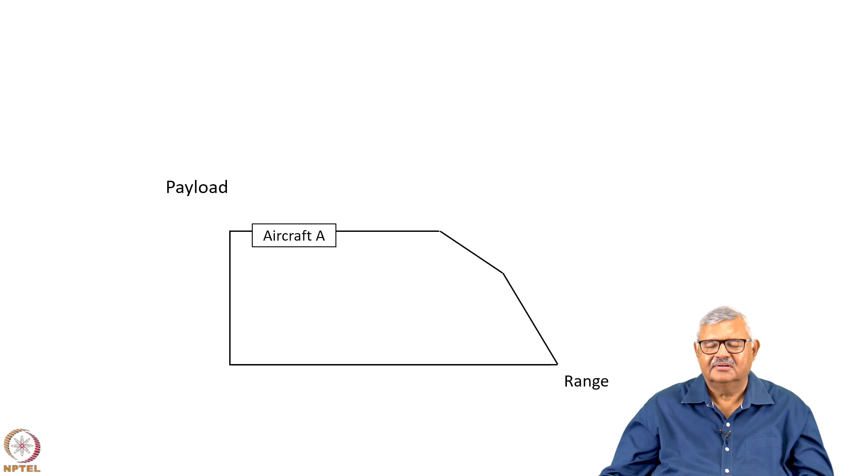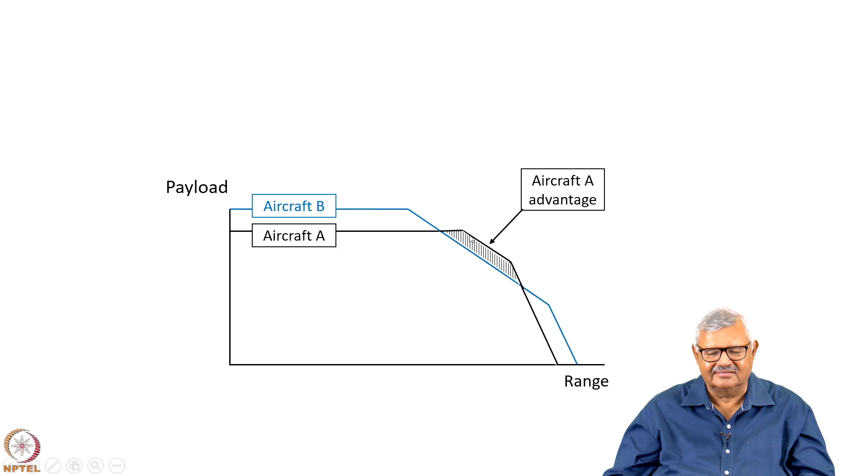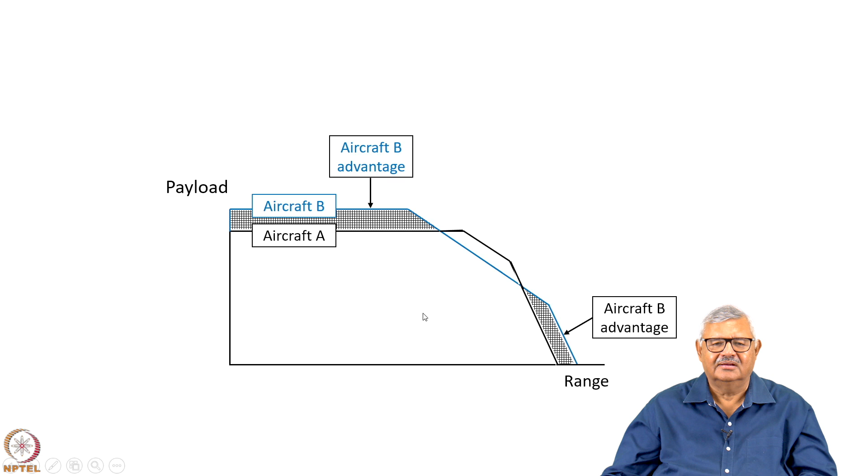Now, if I want to compare two aircraft, aircraft A and aircraft B, this is the RPD of aircraft A, and this is the RPD of aircraft B. If you superimpose them, aircraft A is superior in this area because it can travel more distance with full payload. Its full payload is lower than aircraft B, but it can travel a larger distance with it. Aircraft B is advantageous in this area because it can carry larger payload to these ranges. So depending on your market segment, you can decide whether aircraft A or aircraft B is suitable for you.

So, part 1 ends here and now we can continue with part 2.